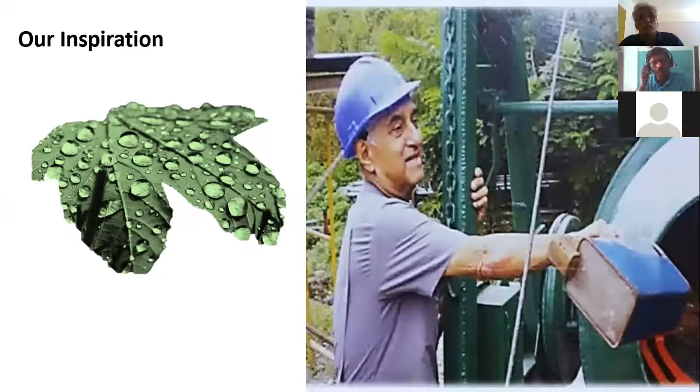We, as Epicons Friends of Concrete, started in 1998. Our inspiration is Remedius. We have been doing workshops with various eminent personalities in the field.

You can see all the stalwarts in the field here. You can see Dr. Yogendra Singh and Mr. Professor MG Gadgil also in that. So these two will be giving today's lecture.

This is our Epicons team, Epicons management team. Next, these are our volunteers who are the main thing.

I'll just give you an introduction of Dr. Yogendra Singh. He is currently Railway Bridge Chair Professor and Professor of Earthquake Engineering at Indian Institute of Technology, Roorkee. He did Civil from IIT Roorkee in 1989, MTech and PhD in Structural Engineering from IIT Delhi. His research interests include performance-based design.

Vulnerability and risk evaluation, non-linear modeling and analysis, and retrofitting of structures. About 25 years of research and teaching experience, guided 13 PhDs, published 65 research articles in various journals, member of several expert teams for post-earthquake damage surveys, convener of the BIS expert group on performance-based design, and collaborated with various universities and initiatives in the continuing education field. I'll request Dr. Yogendra Singh to start his lecture.

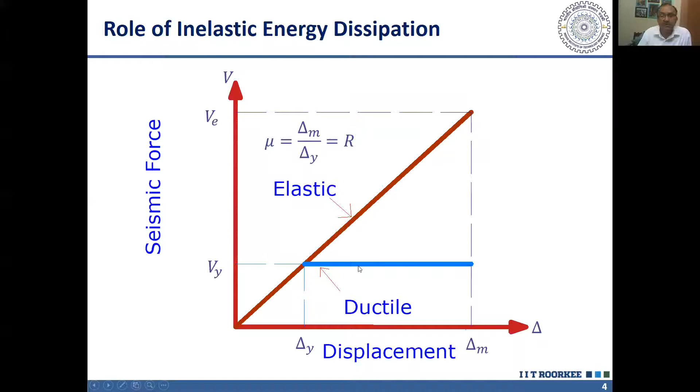Otherwise, the building is called code exceeding, and we have to perform a nonlinear analysis to realistically estimate the ductility. Then, using the relationship with ductility, we can calculate the actual response reduction factor R, which is illustrated in this figure.

Then we divide it by the response reduction factor R in our conventional method, and then apply certain factors of safety. So the actual capacity of my structure is somewhere here. This is our current code-based method. And those buildings where this method may not be applicable, those conditions I have listed here.

Buildings with stiffness and strength irregularities—different types of these irregularities are listed in the code. If any of those irregularities is present, the code-based method is not applicable. In that case, our building is code exceeding, and we have to perform a nonlinear analysis.

There are two types of nonlinear analysis we will discuss. In some cases, a static nonlinear analysis method may be valid, but in many cases even the static nonlinear analysis method may not be valid, and we have to go for the nonlinear dynamic method, also called nonlinear time history analysis.

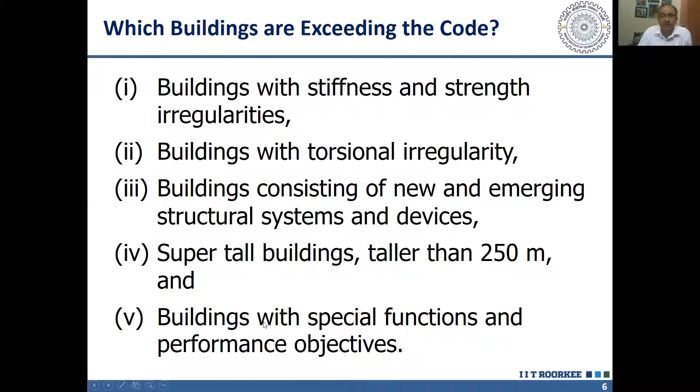You are familiar with this type of building. These are quite common, even in high seismic zones, zone 4 and 5, not only in Bombay - these figures are from Delhi as well. There we have quite irregular configurations of buildings, and their behavior, even linear behavior, is difficult to visualize during a small earthquake in which buildings remain elastic. When buildings yield and go into the inelastic range, this behavior becomes even more unpredictable and challenging to predict. In such cases, the code-based methodology cannot be used.

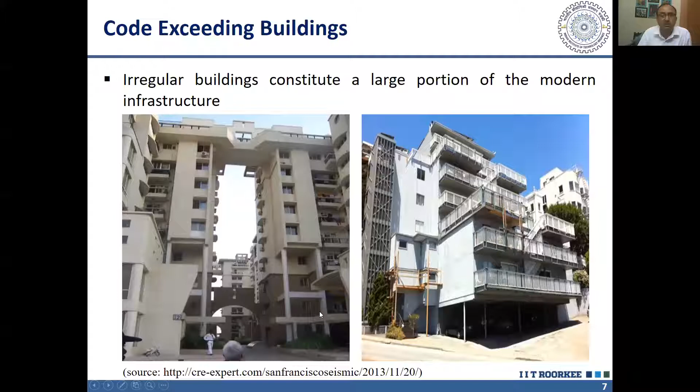The simplified linear analysis cannot be used. The right side building represents a torsional irregularity where there is a large projection, but hardly any lateral force resisting system to resist that, perhaps to accommodate parking. Such scenes are quite common in our urban skyline, and we find many abnormal buildings for which the code-based methodology is not applicable.

In some cases, the topography matters - if we are constructing a building on a hill, the foundations must be kept at different levels, which gives rise to irregular buildings. Here also, the code-based methodology based on the values of response reduction factors given in the code is not applicable. Torsion is one of the major reasons

which has caused failure during past earthquakes, and all the codes of the world put stringent restrictions on the amount of torsional irregularity which is permitted.

Open ground stories have been observed in the Bhuj earthquake and other earthquakes worldwide, where ground stories kept open collapse during earthquakes due to concentration of damage. This is because the response reduction factor R in our code is based on dissipation of energy, and energy dissipation depends on how well the damage is distributed in the structure. If the damage is concentrated, for example in an open ground story, it is concentrated in the ground story.

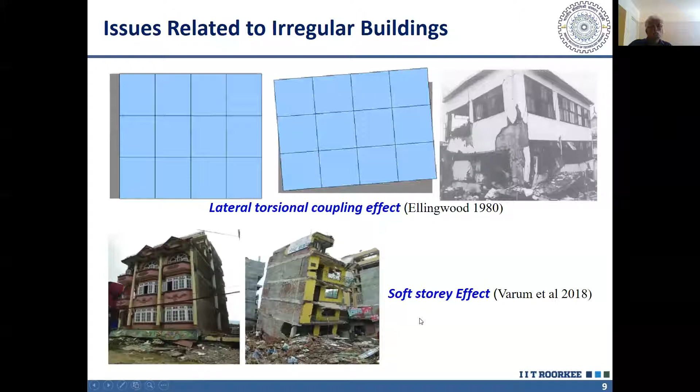In that case, the dissipation of energy will not be good, and the total amount of energy dissipated will be much less. As a result, the effective response reduction factor will be much less than what is given in the code, and we have to estimate that using some nonlinear analysis method.

In case of torsional irregularity, I want to discuss a little bit because this is also relevant to our conventional design. There are three issues with torsional irregularity: one is torsional flexibility, another is torsional eccentricity, which we can say is either mass irregularity, mass eccentricity, or stiffness eccentricity. If there is an eccentricity between the center of mass and center of rigidity, the structure will be subjected to torsional response.

If the building has sufficient torsional rigidity - stiffness being the force required to cause unit displacement - we have stiffness in the translation directions x and y, and in the same way we can calculate stiffness against rotation. If we apply a torsional moment about the vertical axis and calculate the rotation, that moment divided by rotation gives us the torsional stiffness. If the building has adequate torsional stiffness, then even with some eccentricity, its torsional response will be less.

But in some cases, even if the building is symmetric with no eccentricity in both directions, its torsional stiffness may be so low that due to some accidental torsion, the response may be very high. In many cases, a square building with square columns, perfectly symmetric in both directions, will still be torsionally irregular because under a small torsional irregularity - specified in the code as accidental eccentricity - it can undergo large torsional deformations. That's why the code puts a restriction on torsional flexibility as well.

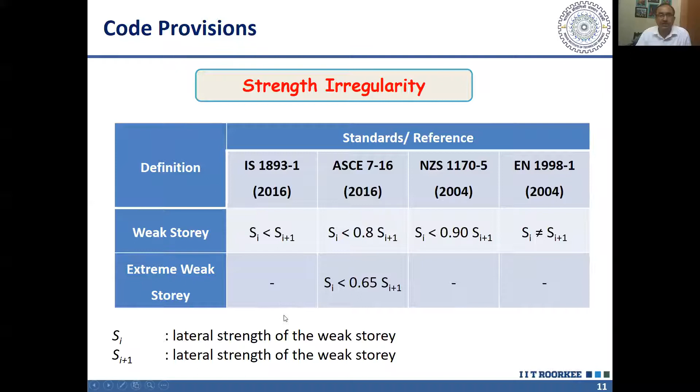To predict the strength of any story, if I have to estimate strength of the ground story versus strength of the upper stories, I have to perform a nonlinear analysis. Only then can I get the estimate of strength and ensure there is no strength irregularity. Stiffness irregularity I discussed and you are familiar with.

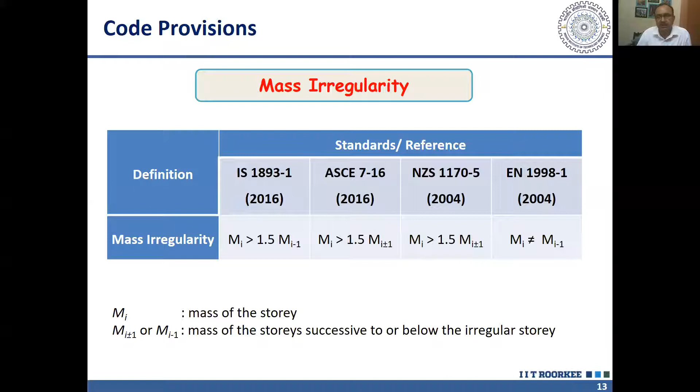Then mass irregularity - two types. One is mass eccentricity, which gives rise to torsion. Another is that a lot of mass is concentrated on one story. When a lot of mass is concentrated in one story, the dynamic behavior of the building becomes irregular, and our normal analysis, especially static analysis, cannot take care of that. We have to go for more sophisticated analysis.

Then there are several types of in-plane irregularity where a shear wall can be shifted in-plane or out-of-plane, and a variety of discontinuities. Floating column is one of the common problems, or the transfer girder in buildings with a podium - above the podium there may be columns starting from beams. All these cause irregularity in the building, and such buildings cannot be designed using conventional code methods with the response reduction factor given in the code; we need a nonlinear analysis.

So the solution, as I'm saying, is nonlinear analysis, and we will talk about this. To summarize, the current codes recommend avoiding irregularity. Irregularities are defined in the code, but it is not possible to follow those do's and don'ts of the code in every case. In many cases, those strict guidelines of the code are not satisfied, and we generally complain that the code is too conservative, too restrictive, and does not allow innovation.

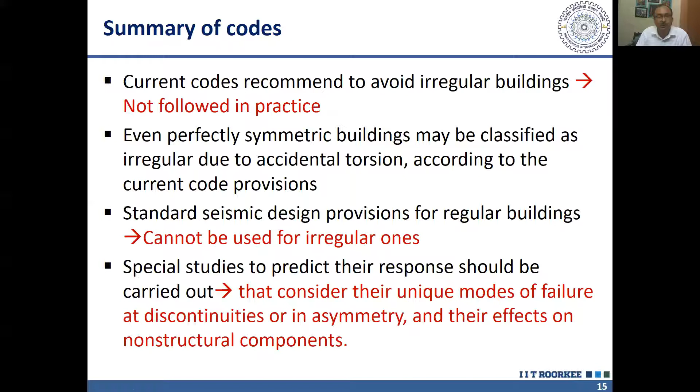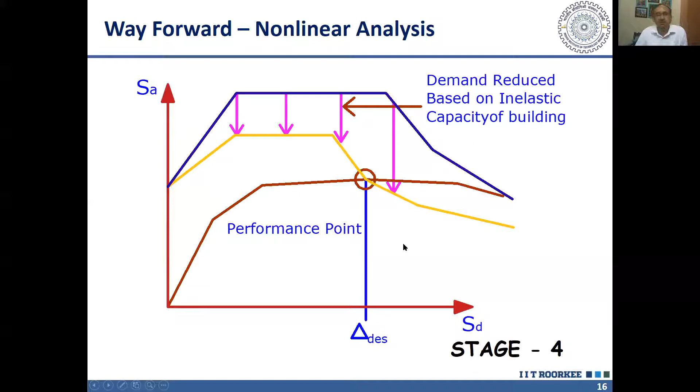So we have to get a capacity curve or capacity spectrum of my structure, and then I can compare the demand and the capacity. And if that combination of demand and capacity is in a reasonable range, which I have targeted, then the design is acceptable. Otherwise, I have to modify the design of my structure.

So one very good reference for nonlinear analysis, because many times people ask which book we should follow for nonlinear analysis, which is the text. So I can say that the best reference available for nonlinear analysis is this ASCE 41 2017. 2017 is the current version, but there are earlier versions also. So this is the most comprehensive document which provides you a lot of information. And this is useful not only for nonlinear analysis, this is very useful even for linear analysis. So I will suggest that we should go through this and have a copy of this.

And as you can see in the title, it is seismic evaluation and retrofitting of structures. So all this methodology was developed for evaluation of existing buildings, because when you are constructing new buildings, code can pose some restrictions, do this or don't do this. But when we are evaluating an existing structure, existing building, we do not have that luxury. Whatever way the building has been constructed, regular or irregular, that has been already constructed. And we have to evaluate seismic performance of the existing structure, in the manner it has been constructed, it has been designed and built.

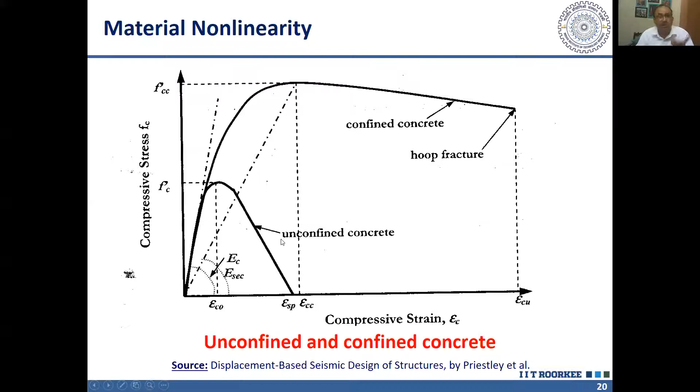So here we see this smaller curve, this is behavior of unconfined concrete, and this larger curve, this is behavior of confined concrete. So unconfined concrete does not have much ductility, but when we confine it, we get good ductility. And confinement comes from the stirrups. You can see here from the hoops, circular hoops, or from rectangular hoops and ties, we get the confinement, and once the concrete is confined, we get good ductility.

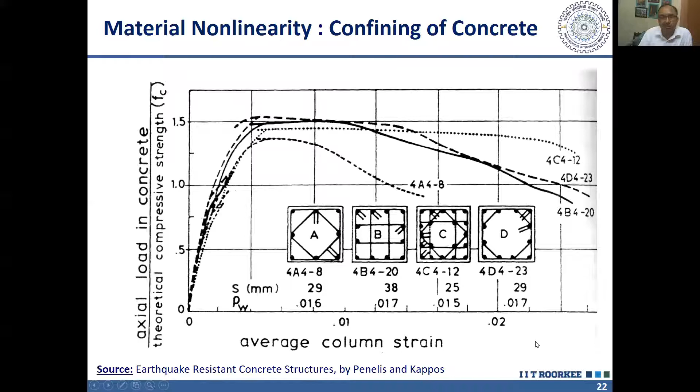And people have compared different types of arrangements, and what you see here, the maximum ductility in our RCC section in bending depends on how many longitudinal bars we have along the perimeter, which are restrained against movement. You can see curve C, corresponding to this arrangement, gives us the maximum ductility, whereas A gives us the minimum ductility. Then steel also has ductility, or rather steel has much larger ductility.

In case of even confined concrete, we cannot get close to the ductility we get from steel. So mostly we depend on steel in our RCC structures for ductility. If we are talking about a steel structure, then of course we have ductile behavior. But when we are talking about steel, the ductility is derived from steel itself; when we are talking about RCC, the ductility is derived from steel. In case of steel, you can increase its strength as the grade changes, and the strength can be increased by cold working and change in chemical composition. But there is an issue: as we increase the strength of steel, its ductility decreases. That's why the codes have a limitation on the maximum grade of steel which we can use, because if we use very strong steel, the ductility will be compromised.

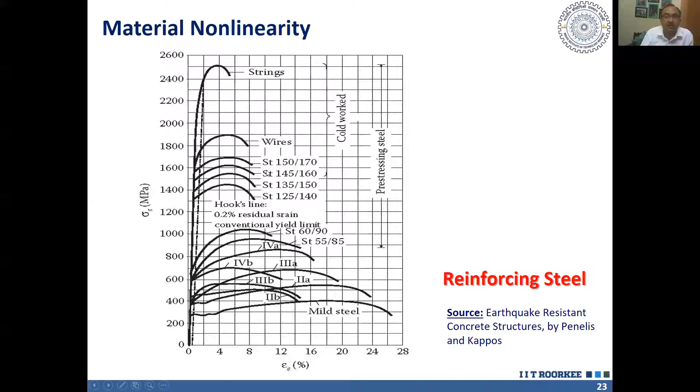Then we can analyze a section. I will go a little bit quick here because this is the theoretical background and I want to spend more time on the practical aspects. But if you are interested, we can discuss.

So we can analyze the section in the same way as you have done in your RCC design course. In any section, we first assume a strain profile by Bernoulli's hypothesis that plane sections remain plane, so the strain distribution is linear. Then we get the stress block corresponding to this strain using the stress-strain behavior of each material, and we get the compressive force and tensile force. Then we equate C equal to T, and then we get the neutral axis depth.

Same thing we do here; only difference is that we add another parameter, which is curvature. Curvature is given by this angle phi, the angle made by the strain profile. This angle is curvature. You can show with some geometry that this angle is actually the second derivative of displacement, del square u by del x square. So that becomes our curvature, and it can be obtained for a section like this.

We take this angle, and then we can go on changing the strain profile, increasing the strain. We get the corresponding moment and curvature, and we can plot this moment-curvature diagram.

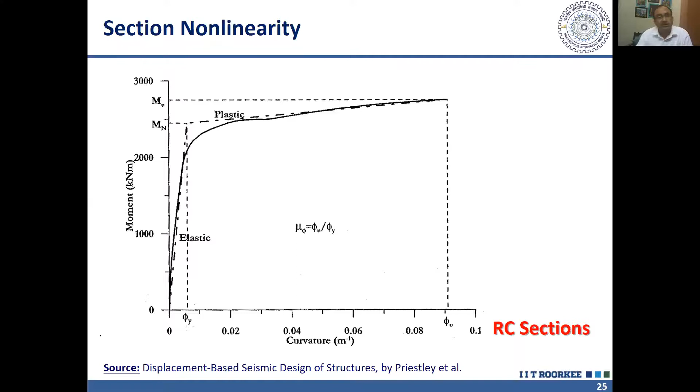Simply, if I take a cantilever and a load is acting here, the moment diagram will be linear. We know the curvature diagram equals M upon EI, so M upon phi equals EI, meaning M upon EI is phi. So until the steel has yielded, this will remain a straight line, and phi will also follow the same straight line.

Once yielding occurs, the relationship between moment and curvature becomes nonlinear, so we get this type of shape.

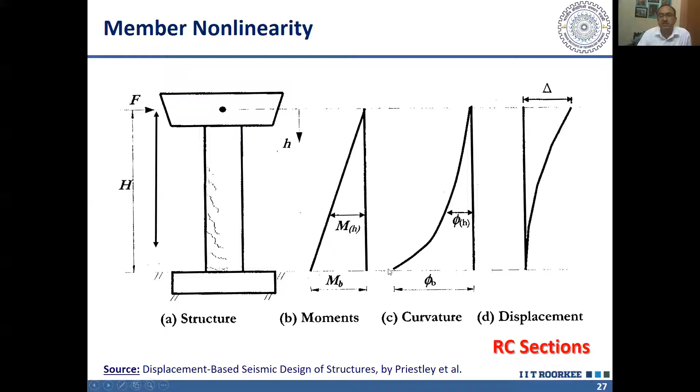Now we simplify this curvilinear shape of the moment curvature diagram by dividing it into a triangle and a rectangle. The triangle portion is done such that the maximum curvature equals phi y, our curvature at yield. So it is equal to the yield curvature, and the remaining curvature is the plastic curvature. This is the ultimate curvature, this is the yield curvature, and the difference of the two is the plastic curvature.

The rectangle's other side, represented by LP, is called the plastic hinge length. This is obtained by integrating the curvature diagram twice, since curvature is the second derivative of displacement, so displacement equals the double integral of curvature. If we integrate this diagram, we get the same tip displacement as obtained experimentally. So LP, the plastic hinge length, is not obtained theoretically but empirically, such that the numerically calculated displacement matches the experimentally obtained displacement.

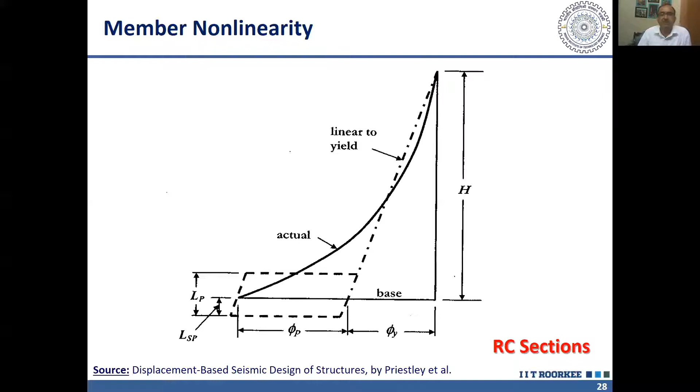Based upon that, several models are there. One model I have given here, so you can go through this.

Then we can convert the moment curvature curve into a force displacement curve, because there is a relationship between force and moment, and a relationship between curvature and displacement. So I get a curve between force and displacement, and this curve we usually represent by an equivalent bilinear idealization.

What is this equivalent bilinear idealization? I am representing it by two lines. The first line, the inclined line, passes through the first yield, the point where the first steel rod in my cantilever yielded. I join this to give me the first line, and the second line I join with the ultimate point such that the area under the two curves is the same.

We are interested in the area because finally we have to estimate the energy dissipated by our structure, and energy dissipation is given by the area under the force displacement curve. That's why we are interested in the area under these two curves, so we obtain this idealized behavior such that the area is matching.

Then this point we define as the yield point, and the corresponding displacement we call delta y. So yield displacement does not correspond to the first yield, where the first rod is yielding. It is where these two lines are meeting, so it is a notional point.

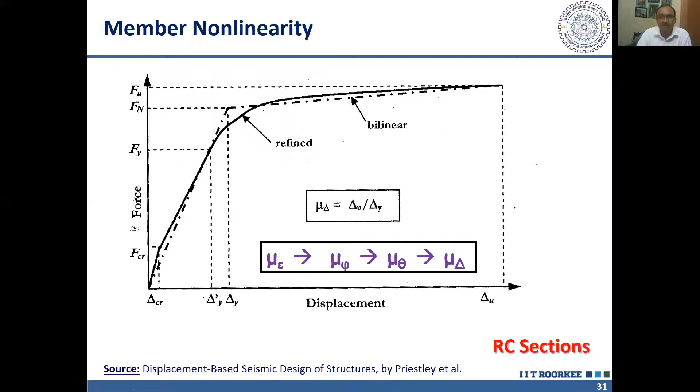So I have to perform nonlinear analysis of my structure in such a way that I get its load displacement behavior, and that I obtain by defining the load displacement behavior of individual members. Then I perform an assembly, analyze my structure, and get the displacement ductility. So displacement behavior is to be obtained.

Now, to represent displacement, we use another term called chord rotation. This chord rotation is different from the usual connotation of rotation we have. If you see this fixed column subjected to lateral translation, it will bend in double curvature, and you can see that the rotation is actually continuously changing.

At the support where it is fixed, the rotation may be 0, and then the rotation increases, and again it reduces, and then it becomes 0. So the rotation is continuously changing along the elastic curve, along the length of the column.

But we define a rotation term which is actually delta by L. So if I join the chord, the two ends of the column, by a chord and take rotation of that chord from this initial position, then this rotation is chord rotation. So this chord rotation is expressed in the units of rotation, radian, but actually it is representing displacement.

So it is like inter-story drift ratio. So in a column, if the top story is displacing by delta as compared to the bottom story, then the ratio of this delta to h, that will give us this chord rotation. In case of a cantilever, this is given by the displacement of the tip divided by the height of the cantilever, and this will be delta by 2.

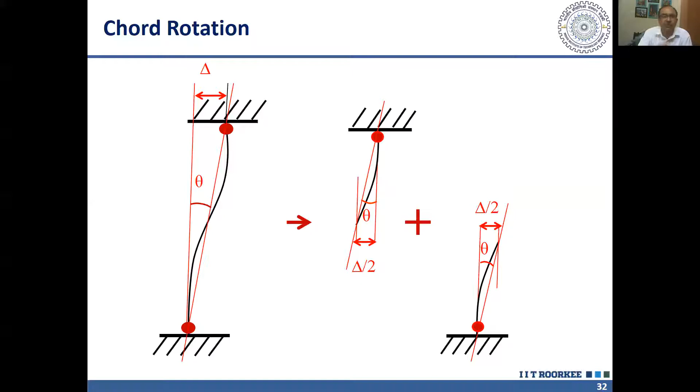So you can see that the chord rotation remains same, because when you divide this into two cantilevers using a point of contraflexure here, you can separate these into two equivalent cantilevers. The total amount of rotation remains same, and that is represented by this chord rotation. So when we will be using rotation in nonlinear analysis, actually we will be referring to chord rotation, not the rotation of the elastic curve.

Then there is another problem. That problem comes because of the cyclic nature of earthquake. So what happens when the structure is subjected to a reversible force and the force is small? Then the loading and unloading curves are same. That's how we define the elastic behavior. So in elastic behavior, loading and unloading occurs along the same path.

So when loading and unloading is occurring along the same path, whatever work we do while deforming the structure, the same amount of work we get back while unloading, same amount of energy.

But when the structure yields, it goes into an inelastic range, and I start unloading it, then it does not follow the same path. Rather, it follows a path parallel to the original load displacement behavior, original loading behavior. So this path and this path is parallel.

And we get this loop under cyclic load, which is close to a parallelogram. And this is called ideal hysteretic behavior, where the loading unloading behavior is such that we get almost a parallelogram shaped hysteretic loop. Another important thing here is that the area of this hysteretic loop is representing the energy dissipated per cycle.

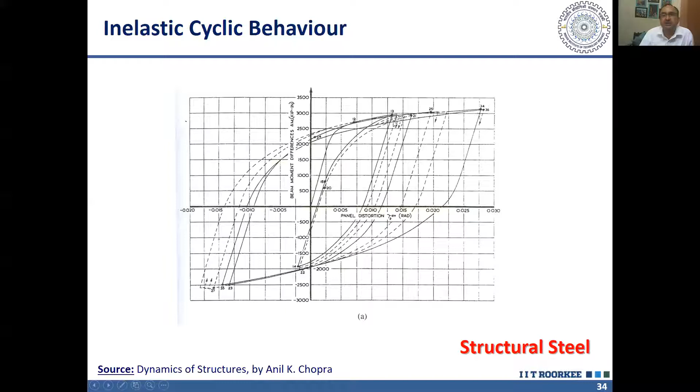And this cyclic degradation gives rise to what we call low cycle fatigue. So you are familiar with the phenomena of fatigue under working loads. When a train is passing over the bridge multiple times, every time it is causing some stresses, but those stresses are much less than the yield stress.

And that will also cause accumulating damage. The damage gets accumulated under each cycle. Actually, the structure requires millions of cycles to collapse. But if the same load continues for millions of cycles, it will collapse.

But what will happen here? In few cycles, the strength is degrading because the damage is much more. We have taken our structure into the inelastic range, where the strain is much more than the yield strain. In that case, there will be very rapid deterioration of strength and the structure will collapse under few cycles. This phenomena we call low cycle fatigue.

And this is the major reason of failure of our RCC or steel elements during earthquake. So in our analysis, we have to take into account this cyclic degradation of strength. Under cyclic load, the strength reduces.

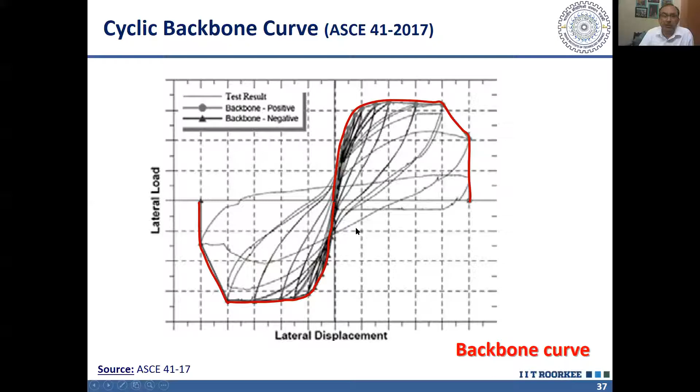But because of cyclic degradation, the strength as well as ductility reduces. So if I use this envelope, I can take into account cyclic degradation of strength. But cyclic degradation of stiffness still cannot be taken into account. That can be considered only in case of nonlinear time history analysis, where we define the full hysteretic behavior.

So based on this envelope, an idealized shape is given in ASCE 41. This idealized, generalized backbone curve is given like this, where point A is origin, B represents the yielding point, and C is the point where there is drastic change in the strength.

So what happens if you are thinking of RCC, then what is happening here? This point is where significant yielding occurs. Please remember, this is a notional point. It is not the point where the first yield in the first reinforcement bar occurred - that was first yield, occurring somewhere here. So here is where the yielding occurs.

And then here, the concrete gets crushed. But you will remember, even when the concrete fails in compression, steel is still intact - it has not ruptured. Still, it can take some more moment, some more load due to catenary action, and this is the residual capacity. Finally, here, the steel also ruptures. When the steel bars also rupture and fail, then there is failure.

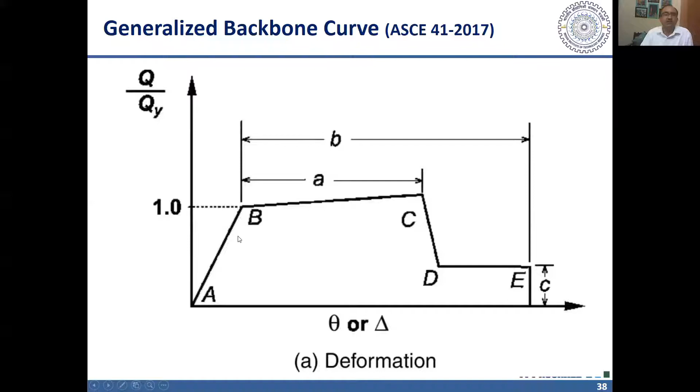So to define this curve, you need three parameters, A, B, and C. Using these parameters you can define it. Point B will be given from the linear behavior, because the stiffness you already know - 0.3 times EcIg - and the yield strength you can obtain from the section analysis. So if you know points A, B, and C, you can complete this backbone curve.

Then there is another model available - this is the so-called lumped plasticity model, which is available in SAP and ETABS. So there you can simulate it. If you are interested in learning more than this, then we can have another talk where we will talk in more detail about how we can simulate this.

But you can at least try with the existing hysteretic models in SAP and ETABS. Then there is a fiber hinge model also, where you can define the section in terms of fibers. There the objective is to simulate this cyclic behavior, cyclic degradation, and the energy dissipated in successive cycles. So the cumulative energy dissipated in successive cycles should also be simulated.

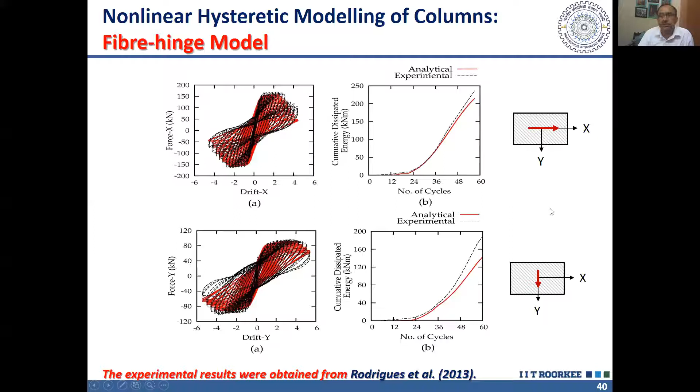As the name suggests, IO is immediate occupancy, representing the damage. It will restrict the damage to an extent that the structure will be able to be used immediately after the earthquake - we can occupy it immediately after the earthquake. Life safety, LS - here the structure and components will get damaged, but large chunks of material, concrete, will not fall, so there is no fatal injury. Some injuries may be there requiring first aid or treatment, but life-threatening injuries will not be there.

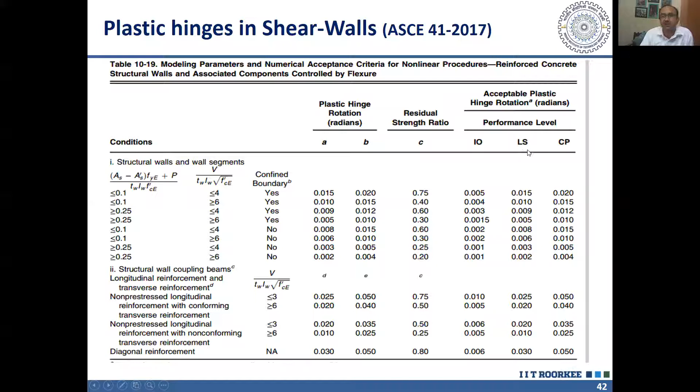Then another issue while doing our nonlinear and linear modeling is modeling of joints. Many times we ignore the joints, but when we are talking about nonlinear analysis or displacement-based analysis, we cannot ignore the joints. So two types of models are possible for modeling the joints. One is what we call explicit joint modeling, where we model the joint using two rigid elements hinged, and the stiffness of the joint is modeled using spring. But this is a bit cumbersome.

So simplified methods are also given in ASCE 41, and it says three possibilities are there. If the column is stronger than the beam, sigma MNC is greater than sigma MNB - this is the nominal moment capacity of column and of beams. So if the columns are stronger than the beams, then we can take the joint portion of the column as rigid, and the beam portion we can assume to be flexible.

On the other hand, if the beam is stronger than the columns, then we can take beam as rigid and column portion as flexible. If both are comparable, within 0.8 to 1.2, then we can take half of the column offset and half of the beam offset as rigid. These options are available in all our nonlinear analysis software, where you can simulate the stiffness of the joint.

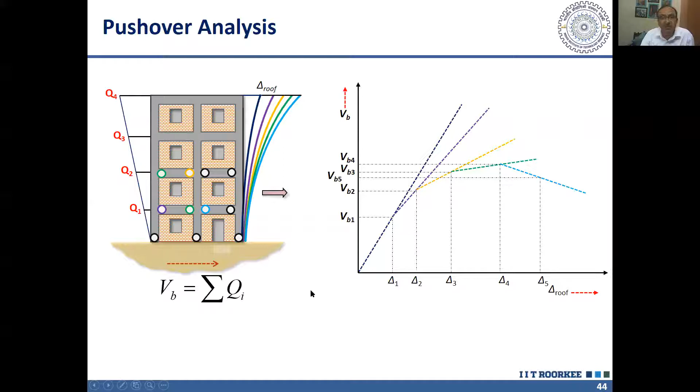So I can complete the analysis like that. And when I join these lines together, this curve which I have obtained by these successive linear analyses, we call the capacity curve. So this curve is the capacity curve, and this is the signature of the building, the characteristic of the building.

Like the demand curve we discussed earlier, the response spectrum, which is characteristic of the site and of the earthquake, not characteristic of the building. In the same way, so far here we have not used the earthquake anywhere, we have used only the properties of the building. So this is characteristic of the building, this is the signature of the building.

On this curve, I will mark each and every point where my members were yielding. I know at which location my first member yielded, then at which location my first member crossed the rotation corresponding to IO. Then here, my first member, it may be the same member or a different member, that crossed the life safety limit. And then here, the collapse prevention. This collapse prevention can occur because one member crossed CP level, meaning one member collapsed, or the structure collapsed as a whole due to P-delta effect. Both ways this collapse can be reached. So this is my capacity curve, this is the nonlinear behavior.

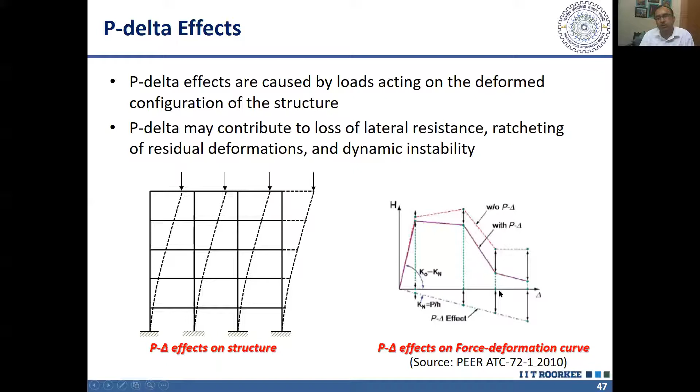So in nonlinear analysis, if you do not consider the P-delta effect, let us say the capacity curve is given something like this. But when you consider the P-delta effect, the capacity curve will be given like this. You can see that the strength will reduce significantly. The displacement capacity is not going to reduce, but the strength capacity is going to reduce significantly due to the P-delta effect. There are different methods of accounting for P-delta effect, I will not go into these details unless there is a question.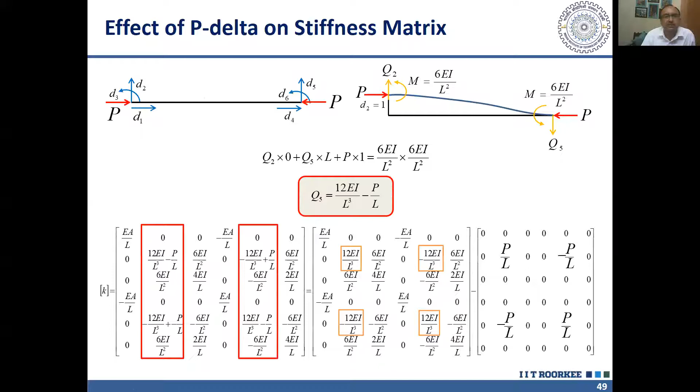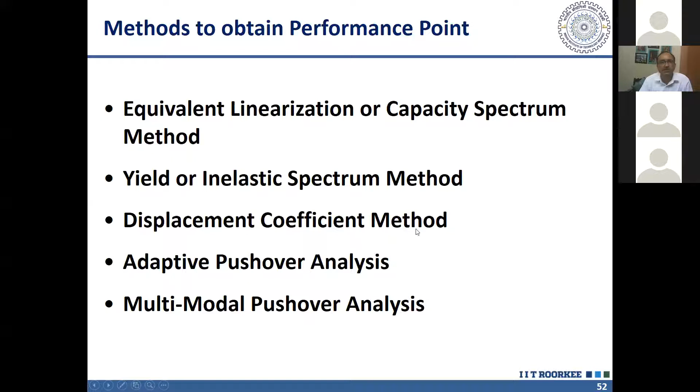Now that was about the capacity curve, how to estimate the performance of a structure. For obtaining performance of a structure, there are several methods, and here we are talking about static methods only. In nonlinear static method itself, there are several methods like equivalent linearization or capacity spectrum method, which is a commonly used method. We have the yield or inelastic spectrum method, displacement coefficient method, adaptive pushover, and multimodal pushover analysis. The most commonly used are the first and the third, so you will find options for these two. Sometimes the capacity spectrum method is also called the ATC40 method, and the displacement coefficient method is the ASCE41 method.

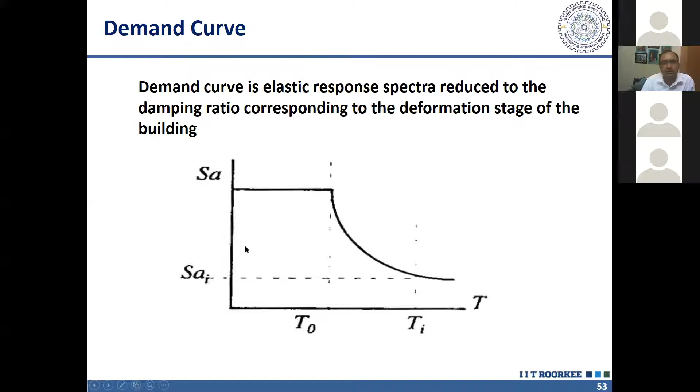Same thing we do for our demand response spectrum, which was in SA versus T. So this SA we also convert into SA versus SD. And the relationship between SA and SD is simple: SD is omega square times SA.

Usually this SA is in units of G and SD is in meters, so we have to convert this into meter per second square by multiplying by G. And omega I can write down as T square over 4 pi square. So this SD is T square by 4 pi square, SA into G. So you can see SD, T and SA — these three are interrelated, so any two I need to know, the third one I can obtain.

So here this is in terms of SA versus T. I convert this into SA versus SD. Another interesting thing you will notice is that a constant period line here is vertical because this is representing constant period. But here, if I take T as constant, this becomes a constant, and this becomes the equation y equal to m into x, which is the equation of a straight line passing through the origin.

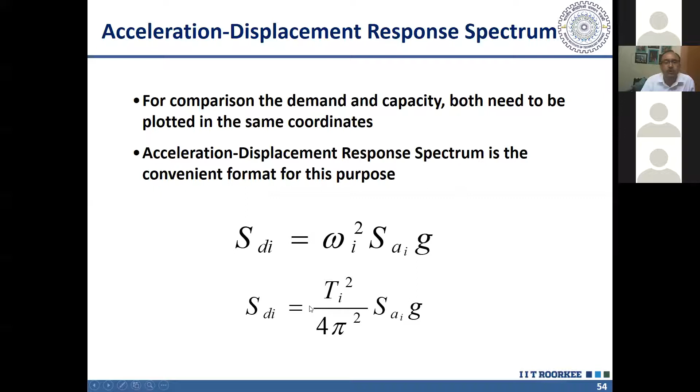So this inclined line passing through the origin represents constant period. A period here will be represented by these lines. Here the period was represented by vertical lines; here period is represented by inclined lines. So now both my demand and capacity are in the same format.

I can compare them. There is only one problem: the demand curve is for a given damping. The response spectrum given in our code is for 5% damping, whereas in the capacity curve, the amount of damping changes because the size of the hysteretic loop is different. As the displacement increases, the size of the hysteretic loop increases, and accordingly the energy dissipated per cycle is increasing. If I represent this in terms of an equivalent damping, then the damping is also increasing.

So I have to ensure that my demand curve and capacity curve have the same damping, and when those are intersecting, this gives me the performance during earthquake, or the displacement during earthquake. So iteratively we can do that.

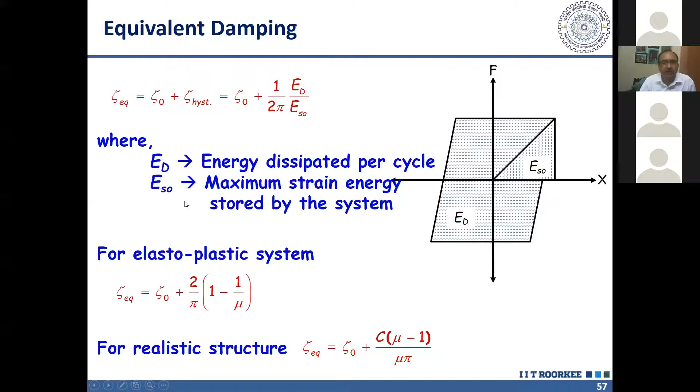And corresponding to xi equivalent, I can calculate a reduction factor. That reduction factor was also given in our earlier code, IS 1893-2002. If you remember, there was a table given corresponding to different damping ratios. Now that table has been removed, but we can refer to that old code, which gives this reduction factor. So I have to take a point here, calculate the equivalent damping corresponding to that, then calculate the reduction factor.

So this is the nonlinear static method, and nonlinear static method — this is the simplest method of nonlinear analysis. We will discuss this with the help of an example also. But this has limitations. What are the limitations?

Here we have used a single mode, so it is applicable only to those buildings where the fundamental mode, or a single mode, has a large contribution — at least 75% of the total mass participated or contributed by the fundamental mode. Then only it will be applicable. Secondly, it is based upon an equivalent single degree of freedom system.

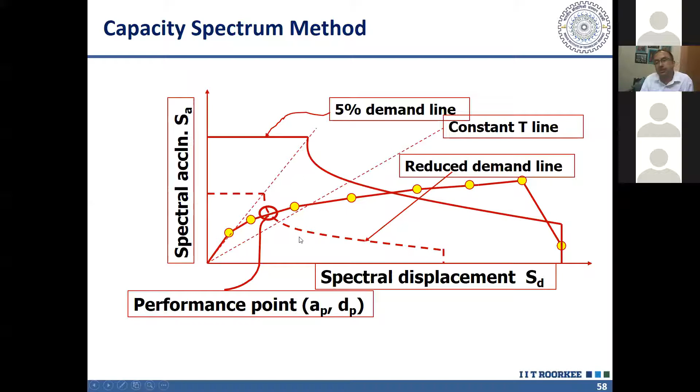So it cannot take into account torsion. If the building has torsional irregularity, then this method will not be valid. In that case, we have to go for nonlinear dynamic analysis or nonlinear time history analysis.

There is another method for obtaining the performance point, which we also know as the displacement coefficient method or ASCE41 method. There is an expression given in ASCE41. You can go through this. I'm not going into these equations, but it is simple. You can use it. I just want to give you some idea about some other topics.

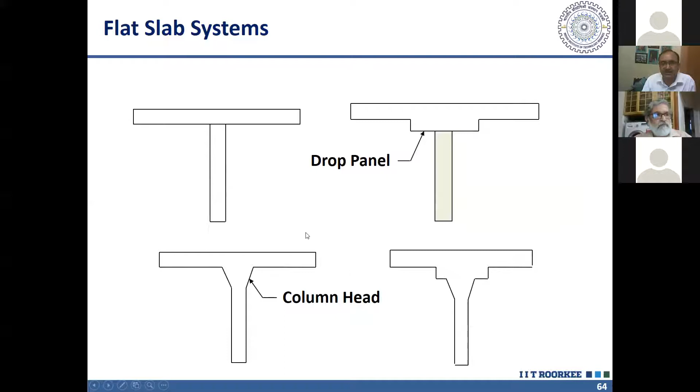So flat slab, you are familiar. Problem with flat slabs is that there is punching shear failure. And we can do nonlinear analysis of flat slabs as well, and for that we have to make an equivalent frame model.

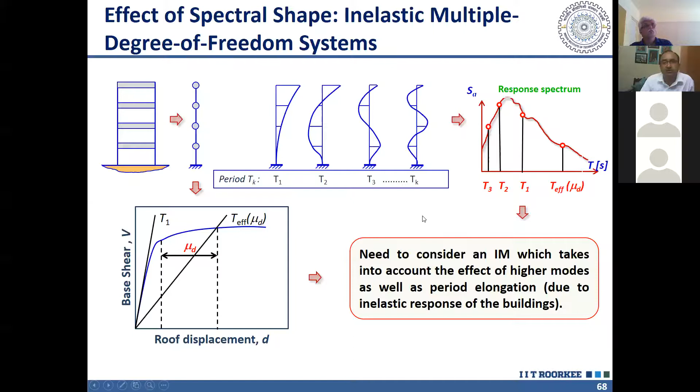Those should be able to represent this whole range, and this whole range we usually take from 0.2T to 3T. So our selected ground motion should be able to consider whole of this range. So ASCE 7 gives detailed guidelines to select the ground motions for nonlinear time history analysis, and it says that we have to consider at least 11 pairs.

Why 11 pairs? Because this response spectrum, corresponding to which we are selecting our time histories, is not given by a single time history. And no real time history will be able to match this response spectrum fully. So one ground motion is never enough. We have to take multiple ground motions, and there is again controversy about how many ground motions we need. Earlier they were saying 3, then 7, and now we are talking about 11.

So 11 ground motions, that means if we are considering a 3D analysis, then 22 pairs, 11 pairs, that means 22 ground motions. So 22 ground motions we have to consider in our analysis.

And these ground motions should be selected in such a way that they represent the seismotectonic regime, the seismotectonic conditions at my site. What is meant by seismotectonic condition? Two things. One is the source, that is the magnitude of the earthquake which can occur and which governs my site, that should be represented, and the type of soil layers at my site should also be represented. The ground motions we take should have magnitude and rupture characteristics similar to what I expect at my site, or which is governing at my site.

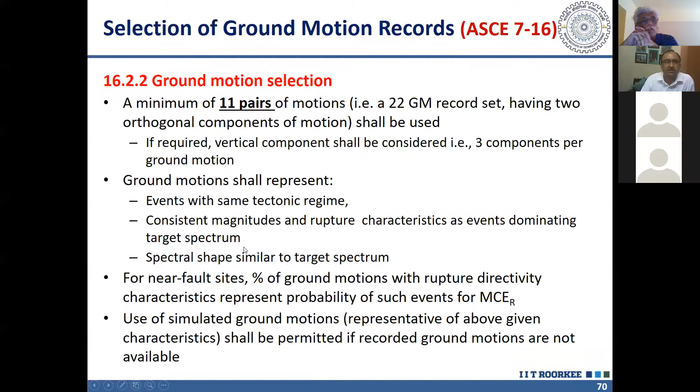Then the spectral shape should match with the target spectrum, and since we cannot match it fully, it should match in this period range TL to TU. TL is 0.2 times our fundamental period, and TU, the upper limit, is minimum 2 times. So 0.2 to 2 times we should take. As I said earlier, some researchers talk about up to 3 times, because it will depend on how much ductility demand is there on our structure.

If we are looking for analysis up to collapse, then the TU will be much larger, because there the ductility demand and hence elongation of the period will be much larger. If we are thinking immediate occupancy or life safety, then perhaps this range is enough. And we may not get, even after deciding this range, enough number, 11 number of time histories. So what we have to do is some sort of scaling or spectral matching of our time histories. What is this scaling? Two types of scaling we do.

One is amplitude scaling, and another is frequency domain scaling. In amplitude scaling, we multiply the whole time history by a factor so that the full response spectrum goes up or down. So the dynamic characteristics remain the same, the frequency characteristics of the ground motion remain the same, only its amplitude is modified. This scaling is recommended by the code.

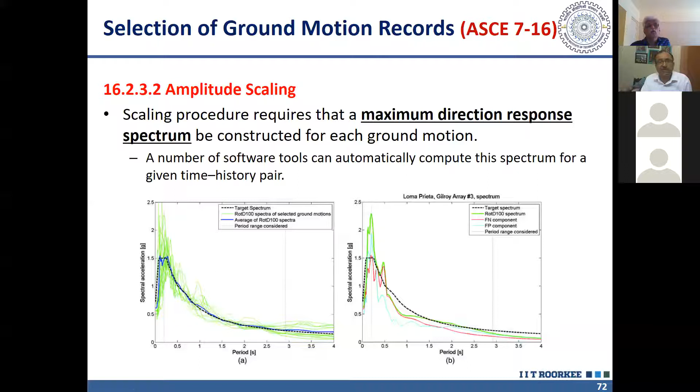Then I will perform analysis for these 11 time histories, and I will consider the average response, not the peak or maximum response, because some of the time histories go much beyond the target response spectrum, so their response may be much larger. If my structure is somewhere here, this response may be much larger, so we are not taking the largest response, we are taking the average response of 11 time histories, and based on that we can proceed.

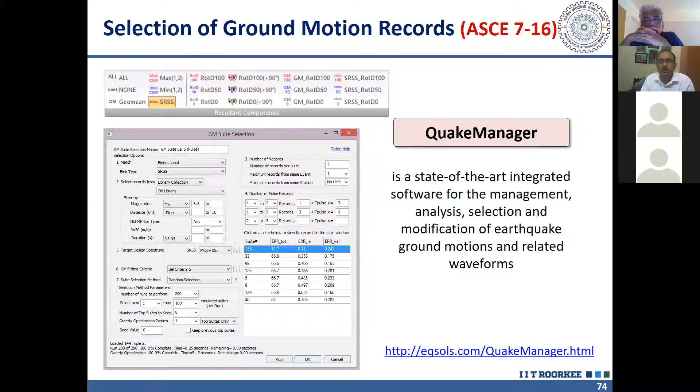There are some open source software tools also available, like this one. There are other tools too, like Quake Manager, which helps you in selection and scaling of ground motions. It is available on this website, you may download it and use it for your nonlinear time history analysis.

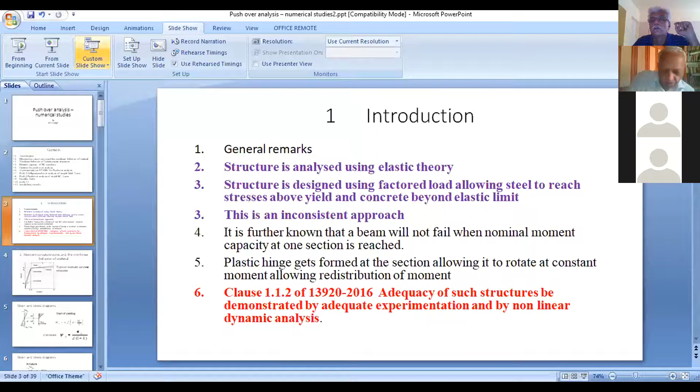Okay, having considered this outline, now I want to consider the first part of the presentation, that is introduction. So we have basically the reinforced concrete structure, which is generally designed using the elastic analysis theory. We presume that the structure is going to behave in the elastic region. We have the normal stiffness method and so on to carry out the entire analysis in the elastic region only.

Having done that, we go to the next stage in the process, that is to design it. But while designing it, we use either load factor or other factors and presume that the structure is designed for much larger moments, 1.5 times or even larger than that. And we further presume that at that level of loading, 1.5 times the elastic analysis, the structure will still remain elastic in the sense the material properties will still remain the same. So this is a very inconsistent approach. We have our analysis based on elastic theory, while design is based on limit state, and we still assume that it is an elastic analysis, or that the material property E value is still as per the elastic behavior. Now, in that case, we say that we are facing our first inconsistency.

Secondly, we all know, and from several experiments, people have realized that if at any point the beam is overloaded, it does not immediately lead to collapse of the beam. For example, if at one particular point where you consider the bending moment in the beam, and if at that point the reinforcement is less than the required reinforcement, the beam is not going to collapse because of the nonlinear behavior of the materials involved. The beam at that point might have its steel yielding.

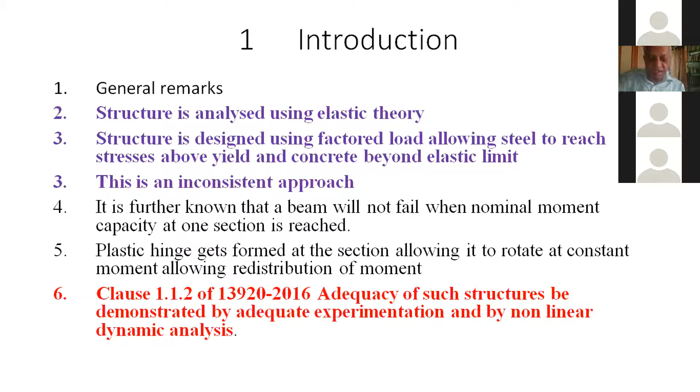Now let us consider the problem before us: we have a concrete section which is subjected to some bending moment, and as the load is increased, we see that the first stage is the concrete starts cracking, so we say that there is a cracking stage.

Thereafter, the linear behavior continues until we get a stage where steel starts yielding. So we have the yielding state, and thereafter the steel goes on elongating, developing large amounts of strain without causing loss of stress. The result of that is the steel is able to take the same moment; only thing is it is going to deform more and more, and so on.

Now, with this behavior, an idealized bilinear curve is generated by researchers. We presume that until some level the behavior is linear, and thereafter it is almost flat, in the sense that the moment remains the same. Only thing is, no further capacity is available at that point as far as resistance to moment is concerned. Rotation can occur at that point, resulting in large deformation, and maybe some redistribution might occur in the reinforced concrete.

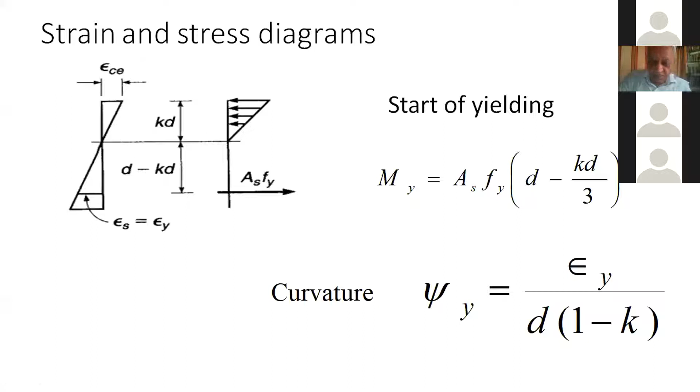Similarly, at failure, we get a curvature which is the ultimate curvature, which is also the strain at that particular point and the distance of the neutral axis from that point. That is now indicated as psi u, which is the strain in concrete, and the distance between the extreme compression fiber and the neutral axis, which is C. Accordingly, we get the curvature at ultimate.

Now let us see how a simple continuous beam is going to behave when it gets overloaded. So we have this simple problem of a two-span continuous beam carrying lateral load. At that particular point, we expect a large moment under the load and maybe not so large a moment at the support itself. At this point, the capacity of the member to carry so much moment is not there.

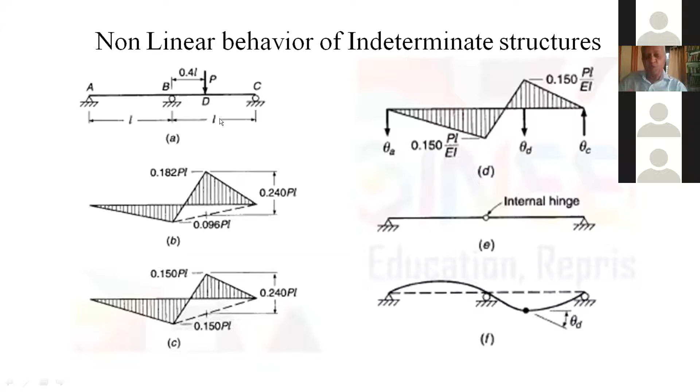Now, having considered that, we have to see whether the reinforced concrete member has got the capacity to undergo the rotation. If that capacity to undergo rotation is not there, then we don't have any use of that non-linear behavior. Over the period, extensive research has been done in this field, and people have finally given some empirical formula.

The empirical formula determines the ultimate flexural strain at plastic hinge, which depends upon the width of the beam, the strain at failure, and the moment gradient, which is the value given by the distance between the maximum moment and the zero moment, and additional compression steel that we are providing, which is steel always provided at the other end, and of course the confining steel, and so on. All of that put together is given in terms of a formula.

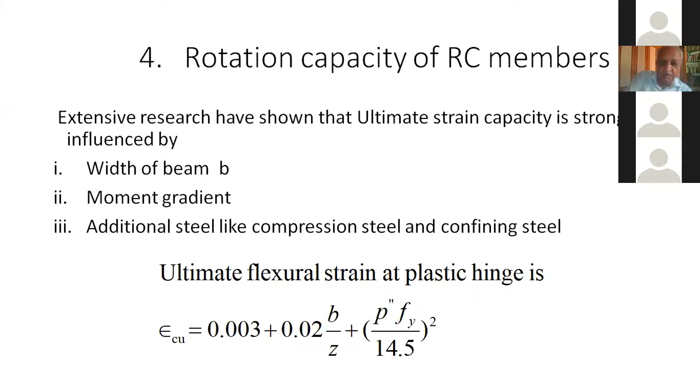Accordingly, we can see how much ultimate strain is available at a particular point, and accordingly what is the ultimate curvature, and finally the rotation that the beam can undergo. That is as far as the general behavior of the material is concerned.

Now let us see that, having got all this theoretical knowledge, I want to now carry out the pushover analysis. For pushover analysis, we have got basically three options.

One is you apply some load, as Professor Yogendra Singh has indicated, where you calculate in some way the force to be applied at each floor level. Either it can be linearly increased from bottom to top, or it can take the shape of the first mode, and so on. So you consider some kind of load distribution that you want to increase indefinitely by a multiplying factor, and finally see how the structure performs in the inelastic region. That is as far as the incremental loading is concerned.

Sometimes you are required to carry out the pushover analysis by taking displacement as a criteria. So you have a structure of some height, and you want to push the structure by some amount at the topmost point. For that push, I want to see whether the structure is going to perform properly in the inelastic region. So that is the incremental displacement, where you decide how much deflection the structure is going to undergo under the worst earthquake, and accordingly try to see how the structure behaves and whether it can withstand that much displacement.

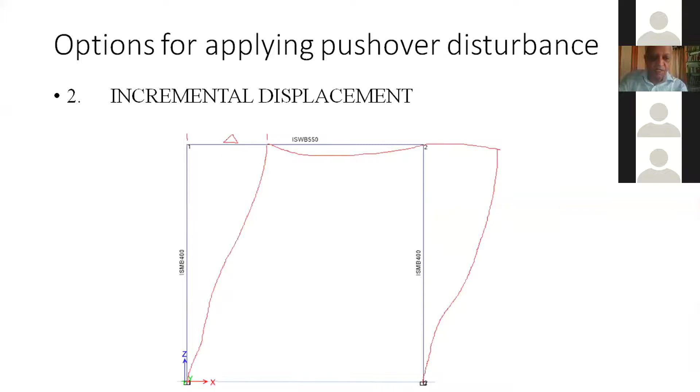So we see that we have three different options of applying the load, namely the incremental load, the incremental displacement, or the incremental ground motion. Now we see that we have got all these tools ready.

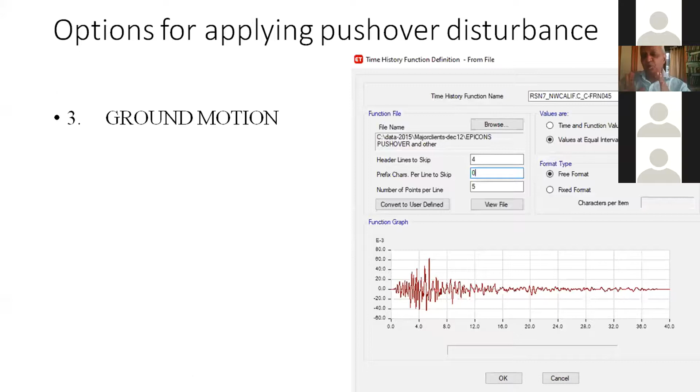We have the software, and now to use the software we have to see how to go about the entire process. First thing is you need the ETABS software with the ultimate version. That is very important because most of us are using normal ETABS for linear analysis, but this ultimate version is different.

It is quite costly and you need to get that ultimate version before you carry out this pushover analysis. So it is not part of our normal ETABS software. You need to get the higher version, the ultimate ETABS version.

Now, having got that software, we prepare our model in the usual way. So you have your model with some gravity loads, seismic load, wind loads and so on. Then you design the structure in the usual way. You have the entire structure designed for the normal loads which you otherwise considered. Forget the pushover analysis, it is the normal design that you are carrying out.

Now, having got this design ready, you have designed the structure for the seismic, wind loads, all the loading combinations and so on. And now you want to check its performance, because while designing the structure you are using one important factor which is R, the response reduction factor. So that can be 4, 5 and so on. To that extent, you are reducing the seismic load and accordingly designing your structure.

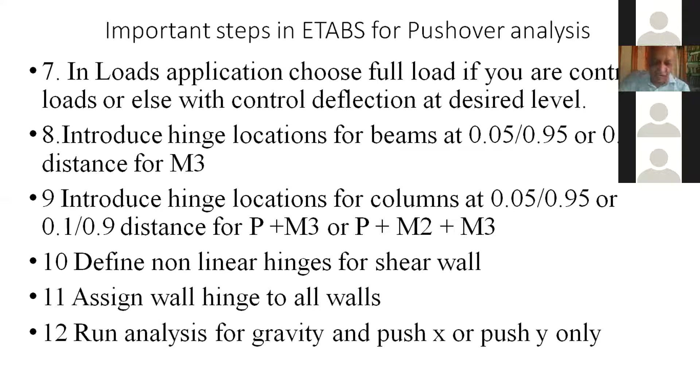Having considered the basic outline, now let us see how we can go about carrying out the pushover analysis of this simple steel frame. I have considered, to start with, a very simple analysis where it is like a collapse load analysis of a steel frame. Whether it is a steel frame or concrete frame, we presume that the rotation capacity at the plastic hinges is adequate, and the rotation is possible at those particular points.

I have considered this plane frame with the columns of ISMB 400 and the beam of ISWB 550. With these displacements and sections, now I am considering the pushover analysis over here. First of all, we consider the mass source for considering the lateral deflection over here, and for that mass source we have got either the dead load, the live load, and so on, in the usual way that you have already got as part of your first analysis.

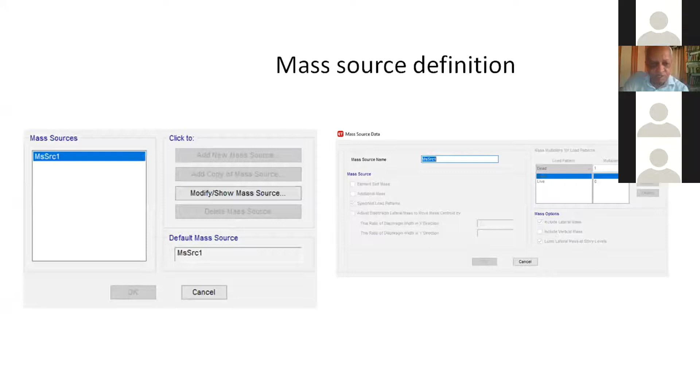Then we have the load pattern, which involves the dead load, which can have several items, or the live load, and then you have the pushover analysis. For pushover analysis, we have got description as 'other' category. Under the type, you have got several categories, and out of that, 'other' is reserved for pushover analysis only. So we say that we have the load pattern defining three basic cases: dead load, live load, and push X.

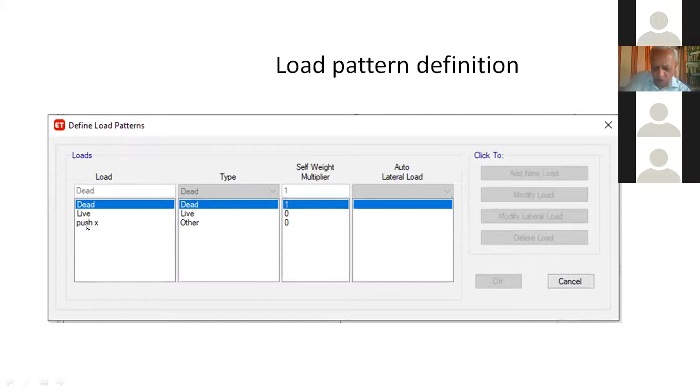Then we have the load case definition, which involves dead load, live load, and push X, which are already there in load pattern. Now we have got one more case, which is the gravity load case, which is in fact the summation of dead and live. So we take the gravity case as also a nonlinear case, and then consider the pushover analysis along with that. For these two cases, we will just see how the structure performs and so on.

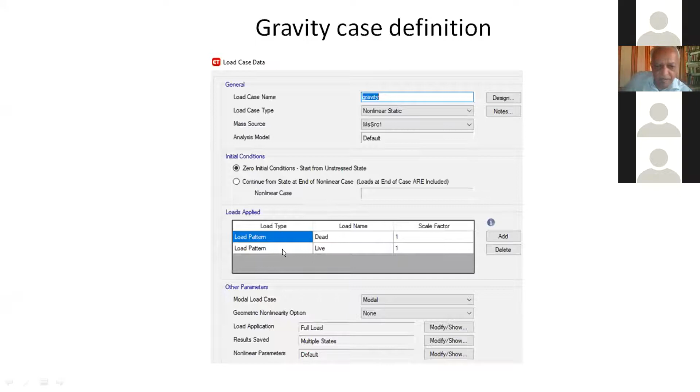Now for the gravity case, we consider the further description: we have a gravity case defined as a non-linear static case, the mass source which we have already defined earlier, and for gravity load we have dead load with whatever load factor you want to consider, and live load also with whatever load factor you want to consider. So that is as far as gravity is concerned, where we say that gravity load is made up of the dead load and live load.

For pushover analysis, we again consider it as a non-linear static case. We have the mass source in the usual way, and for pushover analysis we say that it should consider its effect after the effect of gravity load. So we say continue from the state at the end of the non-linear gravity case. At the end of the gravity case, I will consider the effect of this pushover analysis.

This can be either lateral load incremental, or lateral deflection incremental, or ground motion, whatever is the case. Then I will consider the load applied in terms of acceleration in the X direction, and with an appropriate scale factor. Having considered that, the next is to define how I am applying the load, whether as a displacement or as a lateral load, and so on. For that purpose, I have the next screen, shown over here.

So I will say that I am applying a displacement control over here. I am just specifying how much target displacement I have in mind. In the present case, I have taken 500 millimeters as the target displacement, and at what point that displacement is to be applied. So I am considering it at the top of the first story, at joint number 1, with the deflection in degree of freedom u1 at that point.

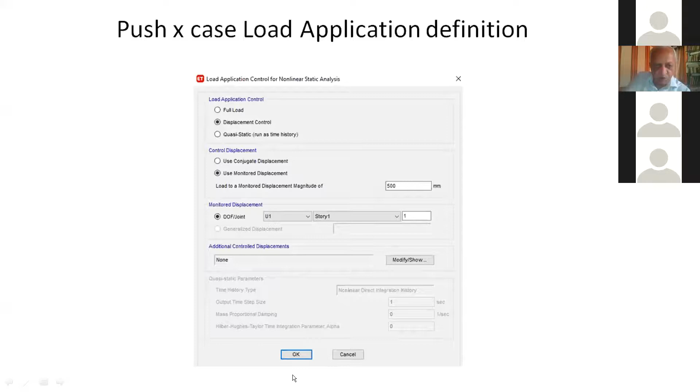Having considered that, the next thing is the second option at this point, which is the result saved — that is for the second one over here, indicated at this point — and that is, in multiple states, I want to save the results.

The minimum number of saved states is 20, and the maximum number of saved states is 100. That is all the iterations it is going to perform, and that many results will be saved in terms of the steps and so on.

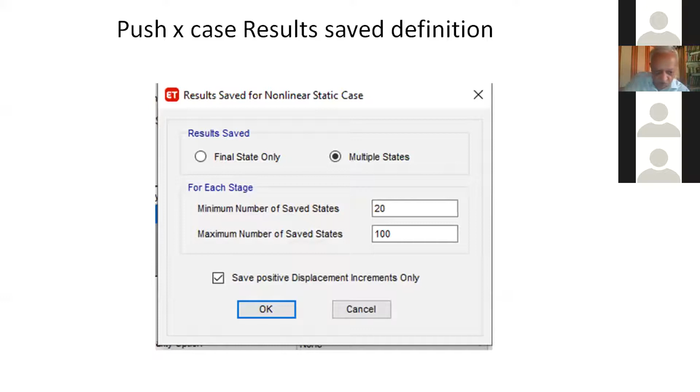Having considered that, the next task is to assign the locations of the hinges. We first consider the beams in the given structure and give the location of the hinges at 5% from one end and 5% from the other end, that is 95% from this end. So we define these two hinge locations, and because this is a beam, we consider that the hinge is only due to the moment M3.

Similarly, we have the same assignment given to the columns and to the shear wall. In the present case we only have columns, so a similar definition is introduced for columns, with hinges under the combined action of axial load and moment and so on.

Now we consider the cases to be run, that is set the cases to be run. One is for pushover analysis, that is nonlinear static - that case must be considered. Similarly, the gravity case must be considered also. Other cases like modal, dead, live, and so on are not to be considered, because we are now considering only the effect of pushover analysis, where the effect of lateral deflection is considered after the gravity analysis is complete.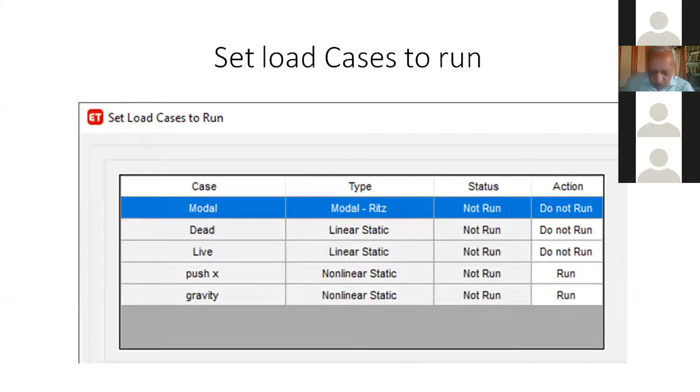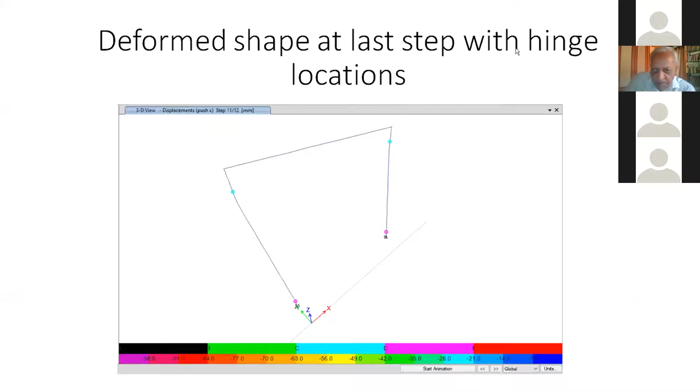Having done that, we now consider the analysis at this stage. For that analysis, let me show you the basic model. We consider the post-analysis scenario, where we have the structure fully analyzed, and now we say, okay, apply.

So after having considered, say for example, this is my first step - a small hinge is formed, but that is also in a very low region in this case, because the full plastic region develops when you see the red color at that point, where it has reached the yield stress and gone beyond it.

As we consider the next time step, some more overstressing has occurred at this point, and so on. I'll continue with this - more and more hinges are formed over here. At the end, we see that pink colored hinges are formed, which is very close to yielding.

If I continue further, at the last time step, which is the 12th time step, we see that a deflection of 96 millimeters has occurred and the hinges are formed at this particular point.

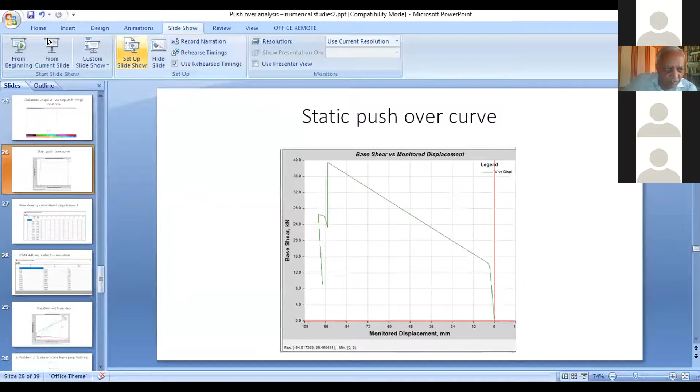Now we see we have got the load deflection curve over here, that is base shear versus the monitor deflection, and so on. The whole thing is also presented in the form of a table where at each step the code indicates the base force and the monitor deflection, so the entire data is available at this particular point.

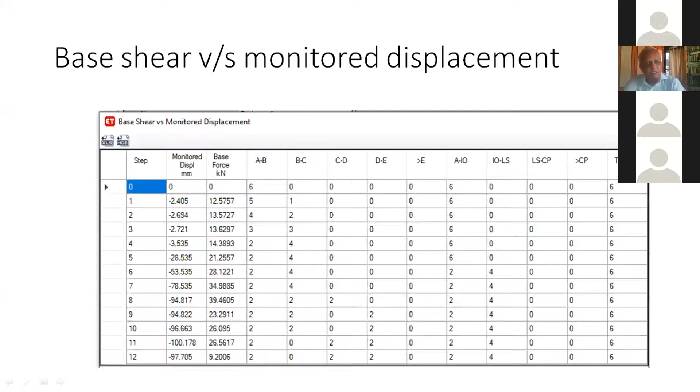Further, the period of vibration for each time step: initially, when no yielding has occurred, the structure was very stiff, so the period of vibration was very low, 0.087. Later, when several hinges were formed, the period increased to 0.386, as the structure has become more flexible.

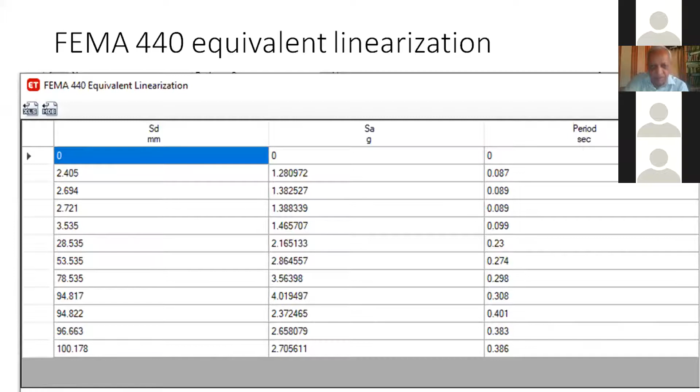So we now see that the entire operation is carried out internally by ETABS, and for that particular incremental displacement, the software has carried out the entire calculations and given you the deflection at different stages, the force developed, and so on.

One more thing to be seen at this point, when considering that FEMA 440 curve: apart from the period of vibration, they are giving you the ductility ratio also. This ductility ratio, as you have seen before, is the ratio of the deflection at ultimate state upon the deflection when the first hinges occur.

As more deflection and yielding occurs, the deflection keeps increasing indefinitely. In this case, the steel structure has a large ductility; here the ductility ratio is as high as 19. So for our structure, larger the amount of ductility, larger the energy absorption capacity the structure has got, and accordingly it has a better chance of survival.

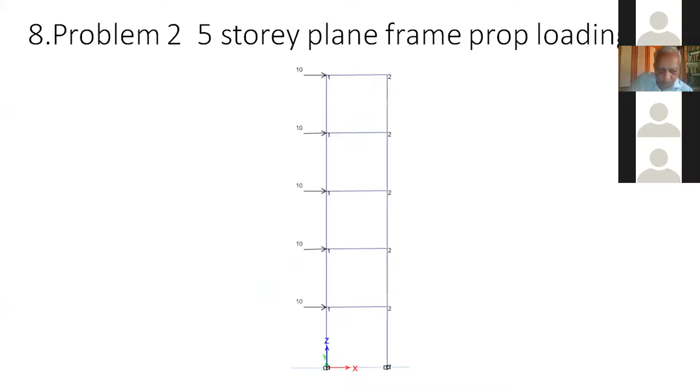The next problem considered is this 5-story portal frame subjected to lateral load, different from the case considered earlier. Earlier we had considered lateral deflection; now I am considering a uniform lateral force applied, 10 kilonewton at each floor level, and with that case as data, the analysis is carried out in the same way.

The only change was the lateral deflection replaced by lateral force; there is no other change. The structure is different, but the steps for feeding the data remain the same. With this, for the last time step, we see several hinges formed at this point.

As far as the behavior of the structure or other response parameters are concerned, we can see the bending moments at these locations. So for the last time step, or for every time step, you can get the bending moments and see how the structure is responding, developing internal forces, and so on.

So we can see that whether you are applying lateral deflection or lateral load, ETABS does the internal calculations in the usual way, depending upon the data you have got. Accordingly, it will generate the response in the inelastic region and give you the desired parameters in terms of ductility factor or maximum load carrying capacity.

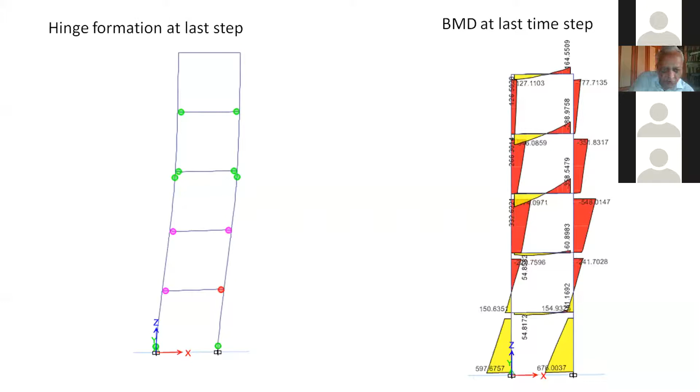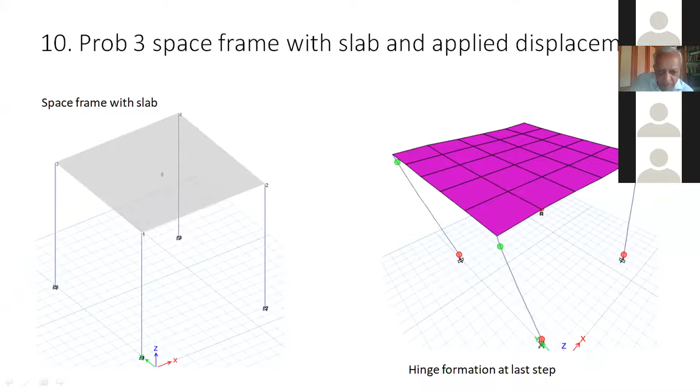The last problem I've considered is a 3-story frame. In reality, this structure is quite big—actually a 22-story structure. But the time required for analyzing 22 stories may run into weeks or months; on my computer it might have taken months for the full pushover analysis. So I reduced the number of floors and tried to see how the structure responds for the lateral deflections.

The steps involved are the same. The lateral deflection is controlled and the structure is analyzed for that deflection, with capacity for development of hinges introduced for shear walls, beams, and so on. After several time steps, carrying out the analysis in the usual way, we see several hinges are formed for this particular structure. Those circles that you see, the field of circles, are the hinges.

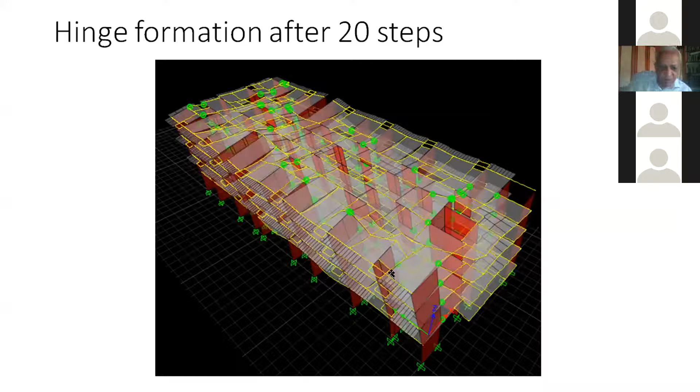So this structure has developed several hinges at the end of 20 time steps and so on. We can see that for any structure you have in mind—for example, this particular structure, in the usual way—I am now considering the response of the structure at this particular point.

If you consider the live development of the hinges at this particular point, as you consider next time steps, more and more hinges are formed one by one, and you will know at which point the first hinge is formed. If you want to take corrective action, you can have your design changed so that hinge formation gets delayed, giving more reserve strength in this particular structure.

So to start with, only a few hinges are formed. Later, with more deflection occurring, more and more hinges are formed in the given structure. Finally, at the end of the desired time step, you have the maximum deflection, and you will be able to consider the complete response for the given structure.

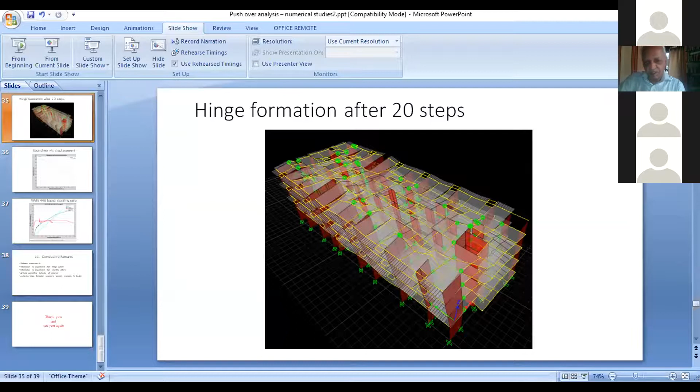So we can see that ETABS gives you the complete picture of your structure under the influence of the lateral disturbance that you are considering.

Now, having considered these four problems, we see that we are in a position to have a tool which is very powerful. It can consider the given structure, its inelastic behavior, and predict the response of the structure subjected to that lateral disturbance.

Only thing is, you will require ETABs with that ultimate option. As far as the entire results are concerned, it gives you at each time step where the hinges are formed. So you can gather that information, and if you want to monitor or act proactively, you can change the reinforcement at those specific locations and delay the formation of the hinges, if you desire, and so on.

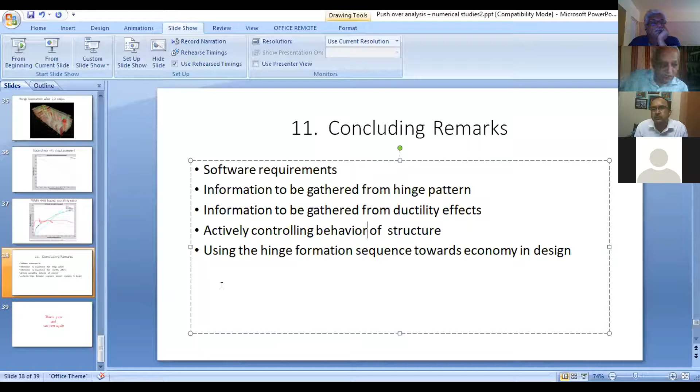The ductility factor can also be obtained in this process, showing how at different stages of loading the ductility factor changes. Accordingly, you can consider active control on the structure, deciding at each stage whether to accept hinge formation at a location. If not, you change the moment carrying capacity by providing a different section or reinforcement. Used rationally, you'll see that at several places hinges don't form at all, meaning there's reserve resistance. You can then change the reinforcement or section at those locations to make the structure more economical.

I think with this I come to the end of my presentation, and I must say I am thankful to you all for patiently listening. I hope that with this presentation you get enough confidence to finally go for pushover analysis of your own structure, understand it in the inelastic region, and effectively use that information to make your design more rational. Thank you.